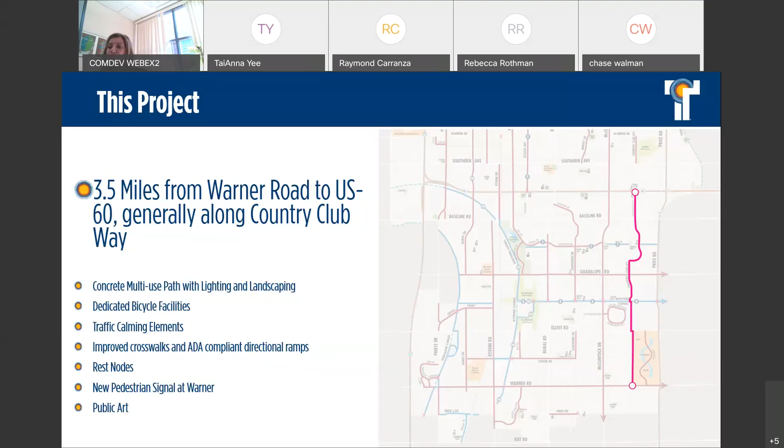So this project includes a 1-mile stretch of off-street facilities, and that will be the concrete multi-use path and equestrian trail on the west side of ASU Research Park from Warner Road to Elliot. And then north of Elliot, those are where we're going to see the on-street improvements. So that'll be the dedicated bike facilities, such as bike lanes, sharrows, or cycle tracks.

In addition to that, we'll be introducing traffic calming elements, improving ADA accessibility in the directional ramps at our crosswalks and our intersections. We'll be providing rest nodes with this project, a new pedestrian signal at Warner Road, as well as the integration of public art.

And that public art process is ongoing currently. There's a citizen selection committee that reviewed artist submissions, and it's now narrowed down to 3 artist finalists. So our goal with that was to get a public artist involved early on in this project so that they would be able to integrate a public art piece within the construction of this project. So that citizen selection, artist selection panel will make their selection shortly, and then that artist will hop on board to our project design team and begin to integrate their art within this project.

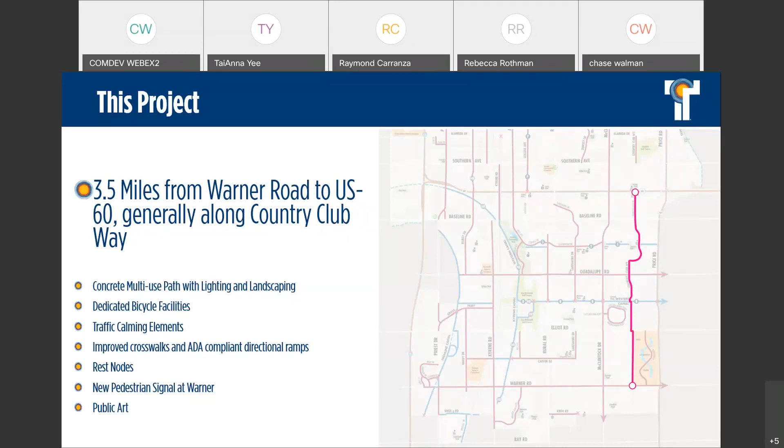So a little bit more project history. The project was first identified in Tempe's Transportation Master Plan in 2015. In 2016, we brought this project as well as other candidate projects to our Transportation Commission to see what they would recommend for us to move forward to compete for grant funding. And in 2016, they recommended this project move forward to compete within the region for additional grant funding.

And we secured an $82,000 grant, which developed our preliminary designs for the project and allowed us to do our first round of public meetings on some conceptual designs and the alignment of the project. And then ultimately, it allowed us to understand the project costs so that we could begin to program the project in the city's capital improvement budget, as well as to seek additional federal grant funding for construction.

So we completed that design, and in 2018, we understood the costs and pursued a federal grant, which we were awarded just over $2.6 million for the construction of this project. And that was for this project from the US 60 to Warner Road.

We kicked off the final design in 2019, and we were about to go out to the public when the COVID pandemic hit, and we were delayed slightly due to not being able to hold those public meetings. We were finally able to have this virtual platform so that we could start soliciting feedback and move this final design forward. So we held our first round of public meetings in October this past year, and this is our second round of public meetings.

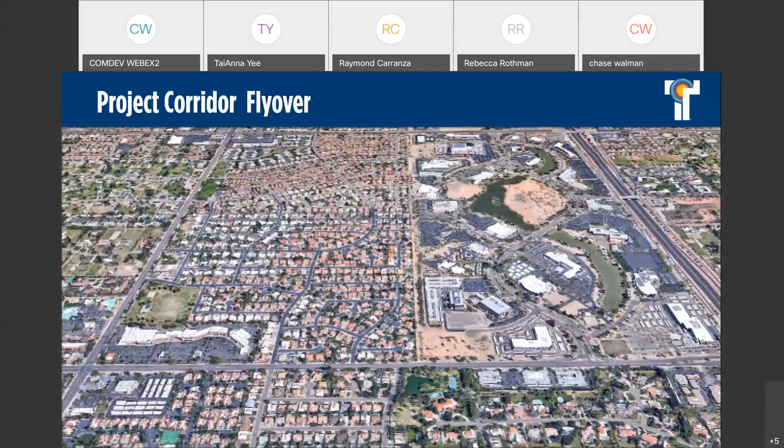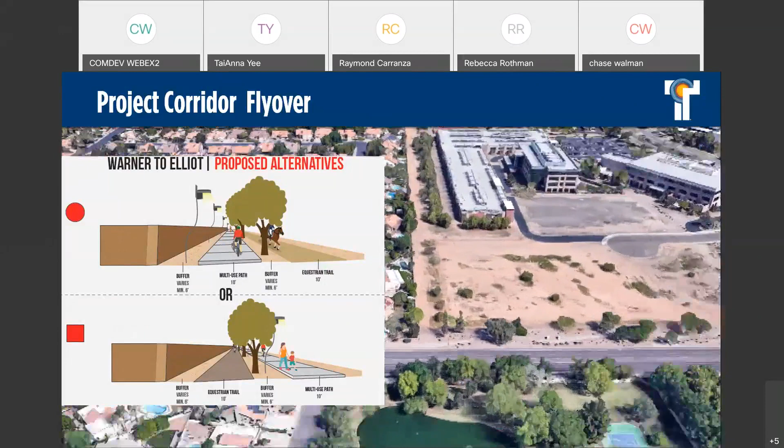This first section was the multi-use path and equestrian trail section. We proposed two alternatives for this section: either a multi-use path on the west side of the easement and the equestrian trail on the east side, or the flip of that, with the multi-use path on the east side of the easement, buffered by the equestrian trail and some landscaping.

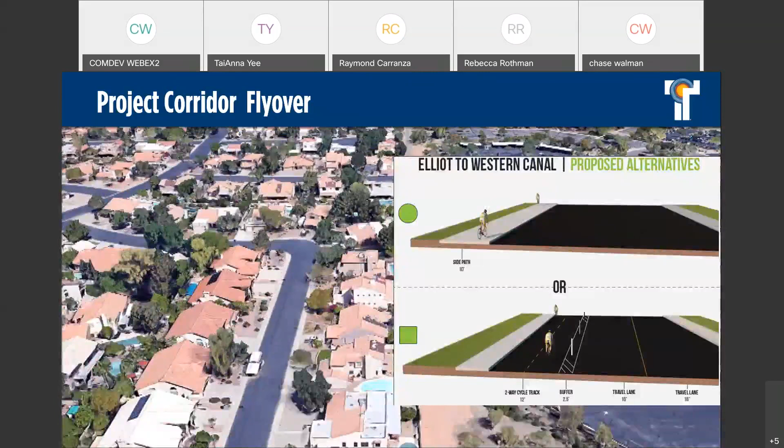Ultimately, the residents selected to have the multi-use path on the east side of the easement, that alternative. The residents in the area directly adjacent cited that it would have more of a buffer space between the path users and those private property walls.

The video's currently moving north. This is one of the neighborhood entrances to the ASU Research Park section of the project. And now we're approaching Elliot Road. It looks like we're having some difficulty here syncing the alternatives, so I apologize for that.

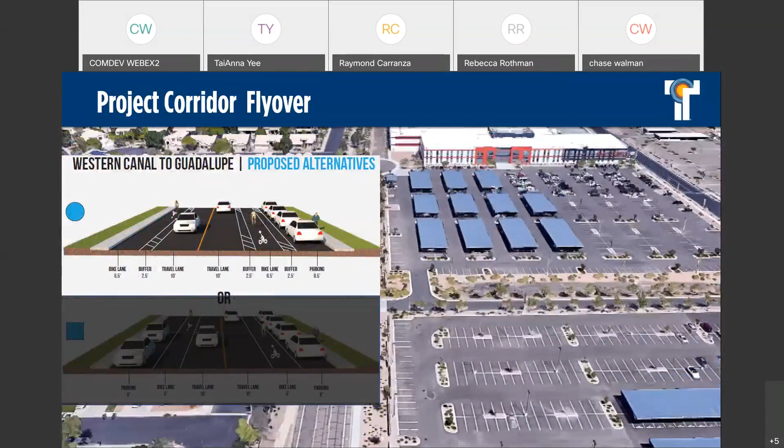This is the Shutterfly Way section, where we proposed either a two-way cycle track on the west side of the street or a side path, which would be off-street. Ultimately, the two-way cycle track was chosen for this section.

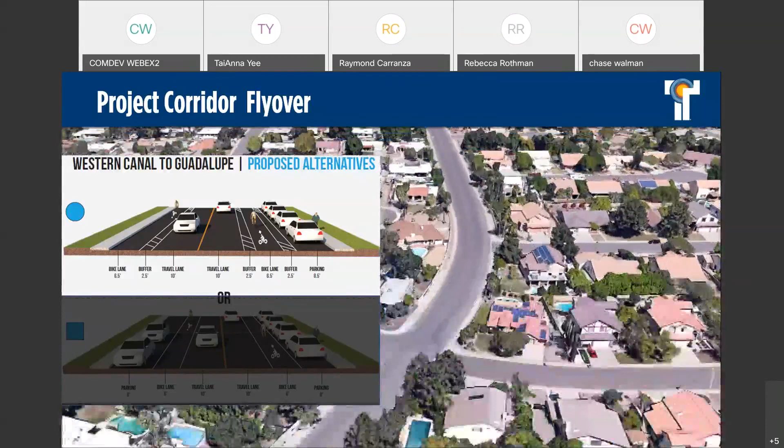The project's moving north, towards Western Canal and more of our neighborhood location. Here, we presented an alternative of either a buffered bike lane section through the removal of the west side parking of Country Club Way from Western Canal to Guadalupe, or standard bike lanes with parking on both sides of the street. Overwhelmingly, the feedback for this section was to pursue the buffered bike lane alternative, which would remove that west side parking and allow a buffer for the southbound and northbound lanes in between the travel lanes as well as the parking on the east side of the street.

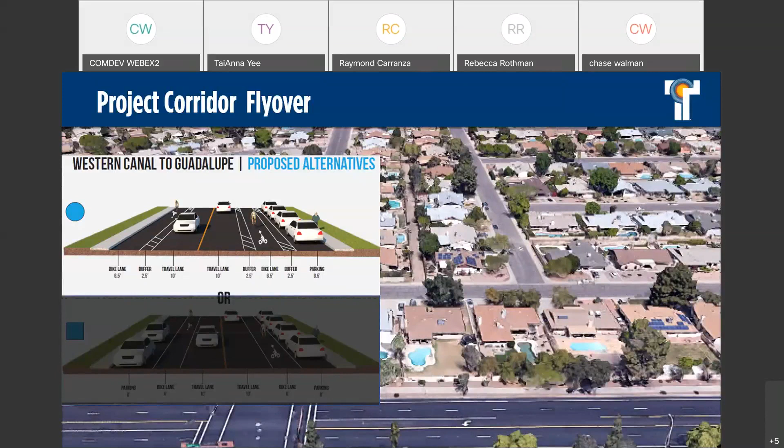So here we'll continue from Guadalupe Road, working our way north. This is where our available right-of-way gets a lot more constrained throughout this neighborhood in Optimist Park. So we presented two alternatives for this section: a bike lane with parking section from Guadalupe to Watson, or this shared lane alternative, which introduced a buffer in between the shared lane and the parking.

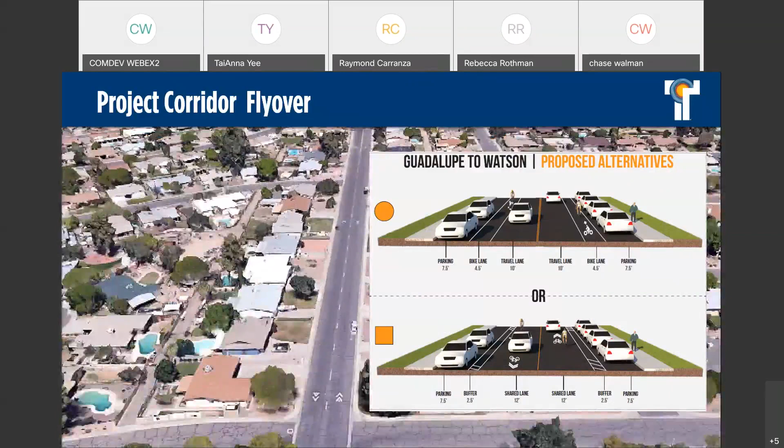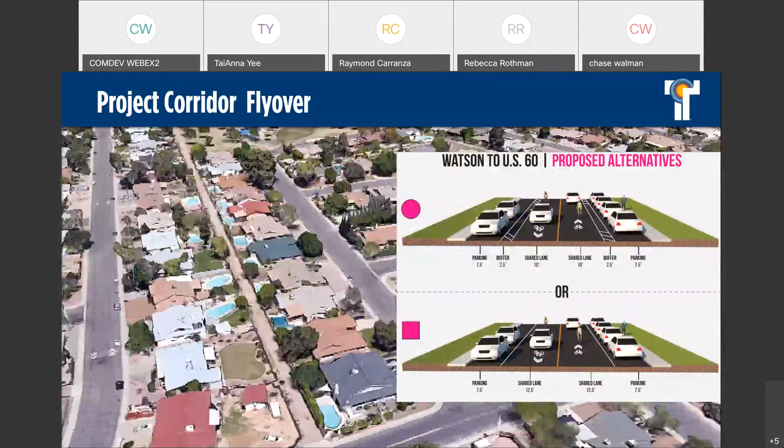This is an alternative that we're seeking additional feedback for as well. And finally, our tightest and most constrained corridor is this Watson to US 60 section. Here we are presenting two alternatives: either a wider shared lane alternative with parking adjacent, or a more narrow shared lane alternative, which introduced a buffer in between both parking lanes. Ultimately, the shared lane with the buffer in between the parking was chosen for this corridor.

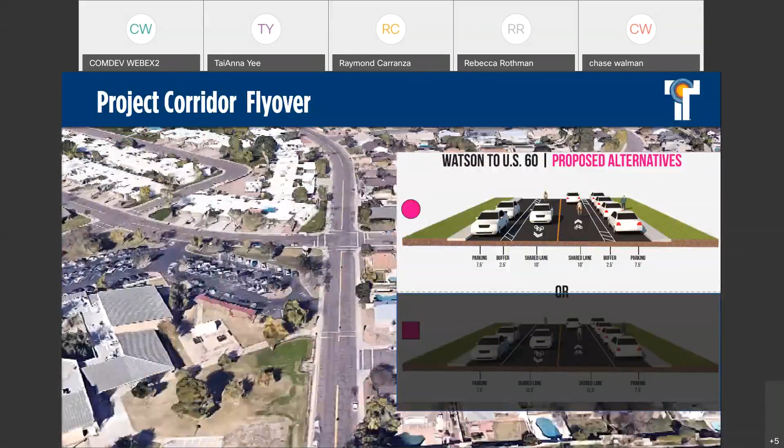We're working our way north still towards Baseline. We just passed Fuller Elementary and the Optimist Park and El Paso Path project. This is the same width that we experienced all the way to the US 60. So this alternative will continue past Baseline Road here and towards the US 60 pedestrian bridge.

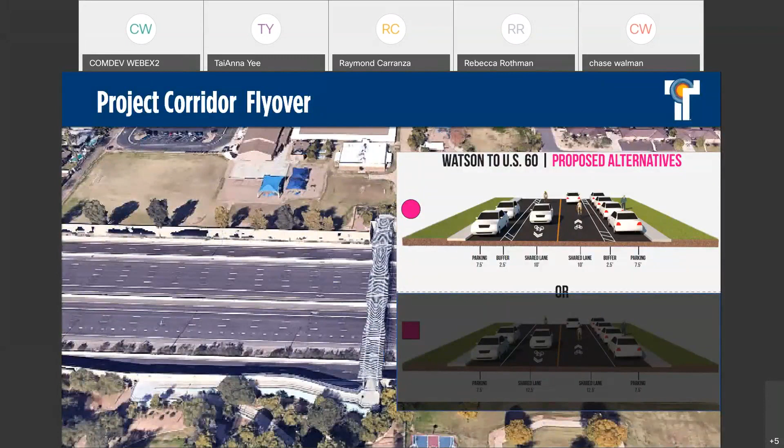Beyond the alternatives that we moved forward through the last round of designs, we also picked out some common threads from the written responses. One of these common themes was the introduction of a pedestrian signal at Warner Road.

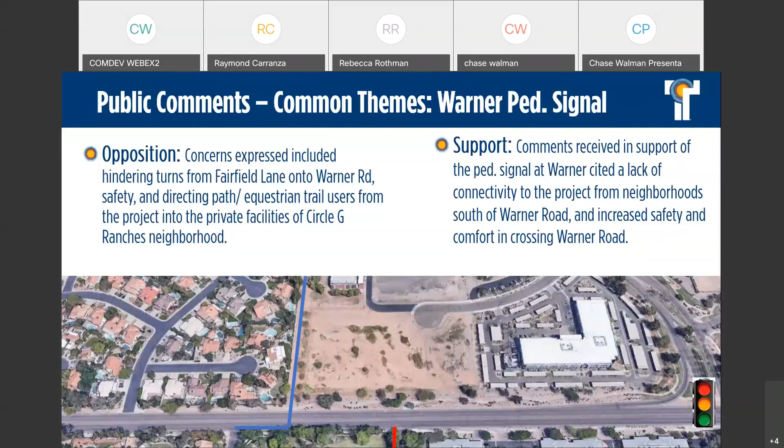Seeing these comments for the pedestrian signal, it was obvious that we needed to review more and better understand what the impacts would be by introducing this signal, having the traffic engineering team—not only from HDR but also the city and our city traffic engineer—understand the impacts, and go a little deeper into these concerns.

One of the things we did was collect more data, especially surrounding the concern about turning movements onto Warner Road. We wanted to confirm that our original data collection from the beginning of the project still reflected existing conditions today, assuming we're observing about a 30% reduction in travel counts for this section of South Tempe.

We went out in the AM and PM peak hours on 4 days, and these numbers represent the turning movement counts observed during those peak hours. That ranged from 17 to 28 per hour, the lowest being the left turn off of Fairfield onto Warner Road going westbound, and some of the highest being eastbound Warner Road traffic turning right onto Fairfield Lane. This was data we wanted to confirm when we went back and studied the impacts of this pedestrian signal with the traffic engineering team.

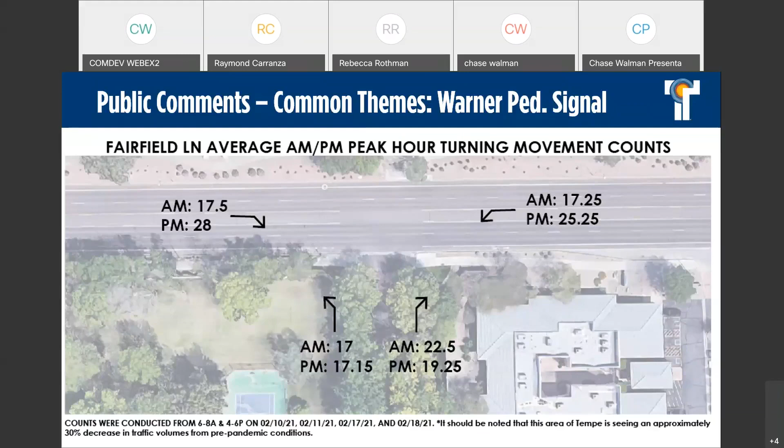This is an image of the proposed alignment of the pedestrian signal and some of the additional traffic engineering review for specific concerns. The first was the turning movement from Fairfield and the concern it would be hindered by this pedestrian signal. Through the traffic engineering review, it was determined the turning movements from Fairfield would actually benefit from this signal, because larger gaps would be created to help the turning movement onto Warner. This pedestrian signal is only activated when a pedestrian is there to actuate it by pressing the button; otherwise the signal is not stopping traffic.

Once activated, it will stop traffic both eastbound and westbound to allow bicyclists and pedestrians to cross Warner Road north and south, and this phase would be about 30 seconds. With that signal turned on, it creates a larger gap because eastbound traffic would be stopped before the signal, allowing a larger gap here at Fairfield Lane.

In addition, the traffic engineering review determined there would be a safety benefit also created by that larger gap—providing not only a dedicated phase for pedestrians and bicyclists to cross Warner Road without vehicular traffic, but also removing a potential conflict point of eastbound traffic interacting with those trying to make turning movements off of Fairfield Lane.

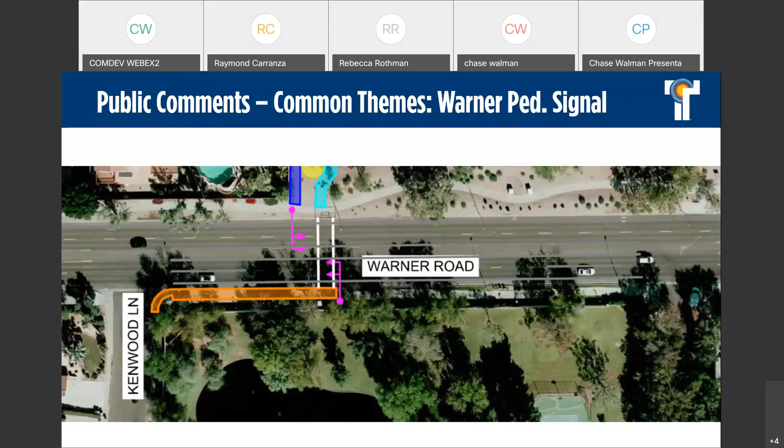Some other common themes we observed through the written comments were concern for removal of mature trees within the ASU Research Park section. These were the established trees on the east end, primarily of this 40-foot easement that we'll be utilizing with this project. So with that, we went back and...

conducted a tree inventory to understand the tree health out there, the estimate of their caliper size, the type of trees they were, and ultimately determined their location and its relation to the proposed improvements of this path project. We highlighted these in red icons, and all these materials are also available online, so you could zoom in specifically and see which trees would be impacted through this project, indicated by those red symbols. The green symbols are the proposed new trees for the project.

With this tree inventory, we understood it would cause the removal or relocation of 36 existing trees in conflict with this project. But with that, we will also be specifying 158 new trees along this section between Elliot and Warner Road.

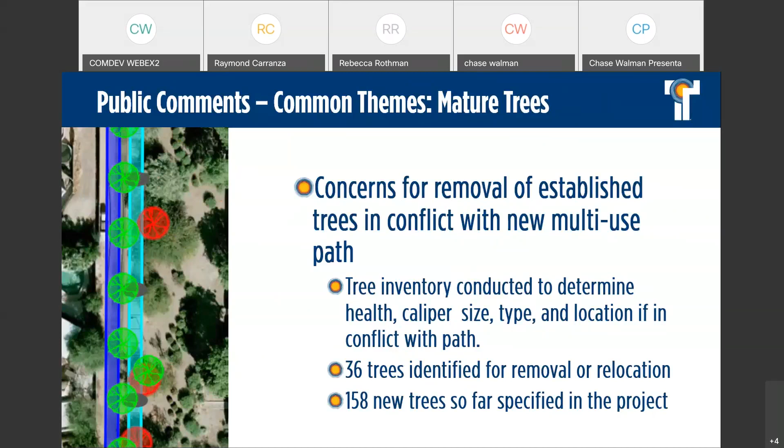And finally, there was a common theme regarding the rest node locations, specifically the type of seating we were proposing at the rest nodes, as well as a concern for lighting within the rest nodes.

Ray will get into how we responded to some of those comments, introducing more lighting. But most importantly, after talking to some of the property owners directly adjacent to these proposed rest node locations, we adjusted the locations of these rest nodes so that they were no longer adjacent to any private property wall.

This is a zoomed-in example of one of the proposed locations, just south of Elliot Road, which has this buffer space in between the wall. This wall to the left is actually an alley wall, and past that alley is where the private property walls are. So with that, we adjusted the location so that no rest node was directly adjacent to any private property wall with the project.

And then we improved the lighting as well as adjusted the seating so that it was more individualized style seating instead of a longer seat wall.

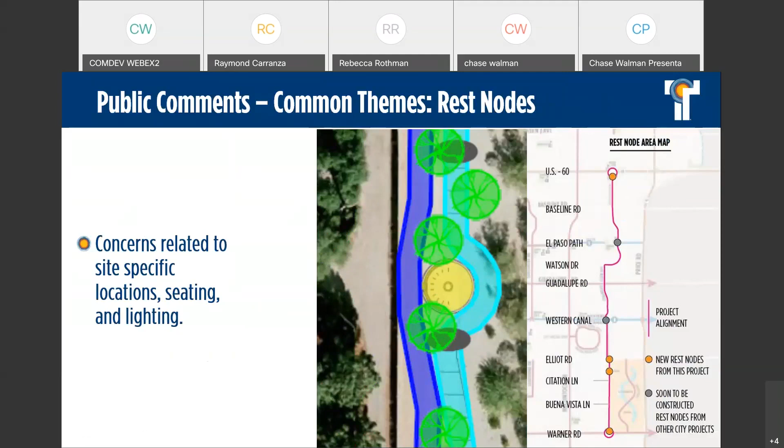So in that previous feedback, to summarize, we asked the public for their feedback on these alternatives, and we're left with these alternatives moving forward in this 30% level design. The Watson to US 60 section was the shared lane with a buffer in between the parking and that shared lane. For the Guadalupe to Watson Drive section, we'll be seeking additional feedback on two alternatives still - a standard bike lane with parking, or a shared lane with a buffer in between the parking.

The Western Canal to Guadalupe section's preferred alternative was buffered bike lanes with the removal of the west side parking along Country Club Way, maintaining the east side parking. The Elliot Road to Western Canal section's preferred alternative in the last feedback was the cycle track, but after reviewing with the traffic engineering team, we also introduced an additional alternative we'd like feedback on - a buffered bike lane alternative.

And finally, for the Warner Road to Elliot Road section, the preferred alternative moving forward was having the equestrian path on the west side of the easement and the concrete multi-use path on the east side of the easement along ASU Research Park.

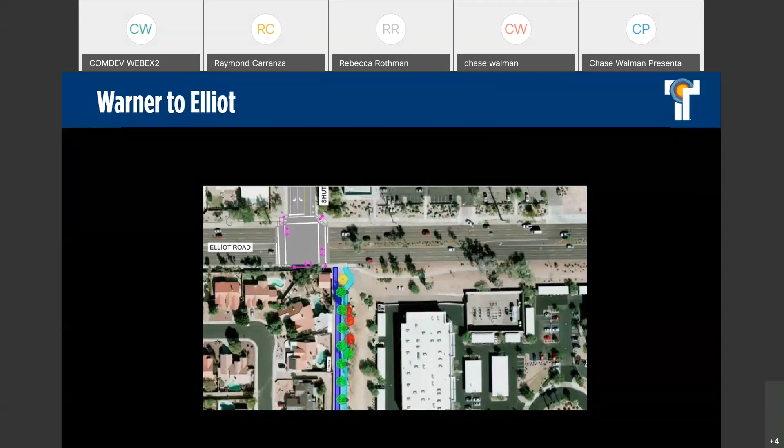Next slide, please. So here's the Elliot to Western Canal segment. As Chase mentioned, we are looking at two different striping options. First, we'll look at the one on the left side - the buffered bike lane alternative, showing bike lanes on both sides with one lane of traffic. Existing conditions in this area, there's currently no parking allowed, so in both these options we're maintaining that and not allowing parking.

Let's go ahead and start the video. So here's that first alternative where we're looking at the buffered bike lane in both directions. There's a 40-foot wide roadway existing today, and as we approach north on Shutterfly Way, it ends at a cul-de-sac. We're planning to reconstruct the sidewalk just on the north side of that cul-de-sac to promote north-south movement of bicyclists.

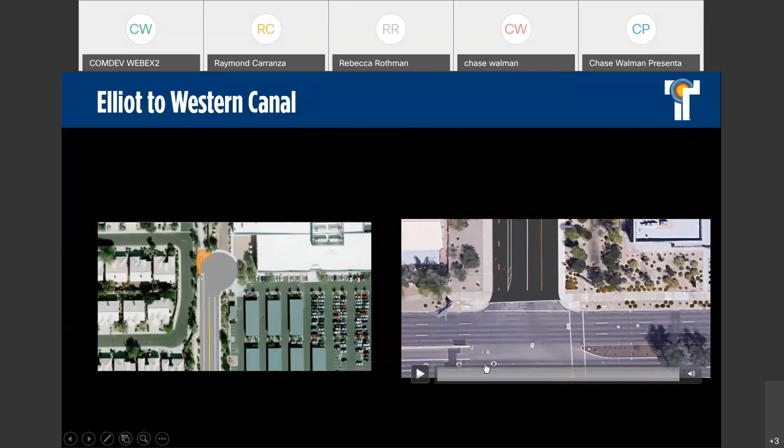So here we are. This is the Elliot to Western Canal segment. From the cul-de-sac to Western Canal, there's an existing 12-foot multi-use path that will remain. The scope of this project is not planning to make any modifications to that.

As we head north to Western Canal, there's some planned improvements being done on a separate project that's going to improve the Western Canal path in this area, introducing another shade node, sidewalk improvements, ramp improvements, and some landscaping and grading. We're not making any modifications to that portion, and our improvements pick up just north of Diamond Drive. So let's roll the video, please.

Between Western Canal and Guadalupe, just based on public feedback, this is the alternative that we're going with. We have the buffered bike lane on the west side, and on the east side, we have the buffered bike lane with one lane of parking. Along this segment, there's privacy walls on both sides and no existing driveways that connect to Country Club Way.

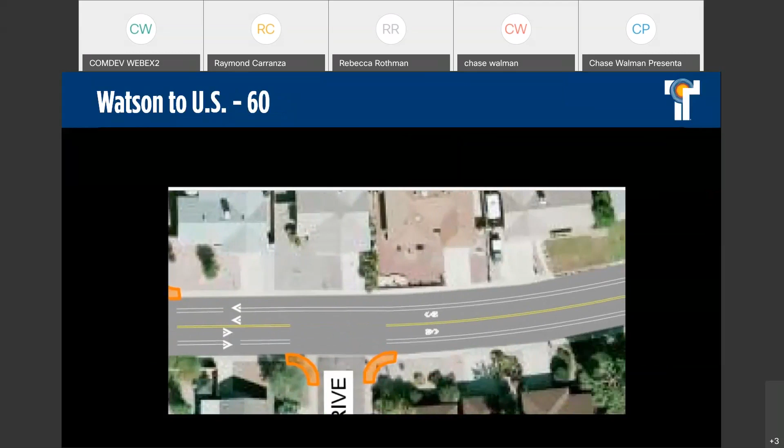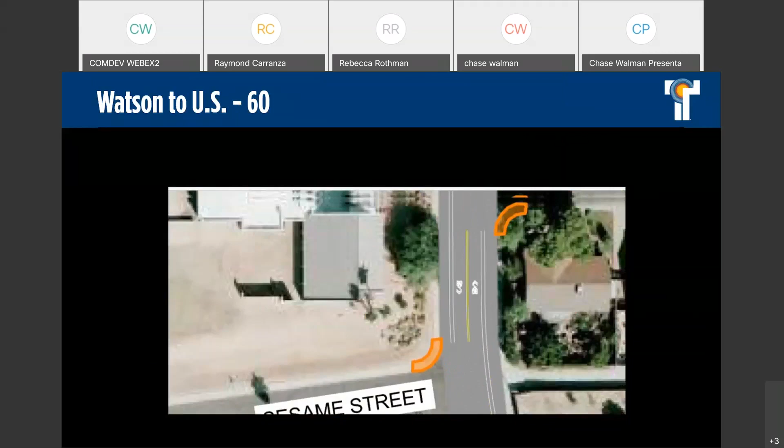What we're moving forward with here, with public input from the previous public meeting, is going with shared lanes, buffered, with parking on both sides. Along this segment, there's on-street parking that's currently allowed today, so that will remain, and there's existing private driveways that connect to this roadway.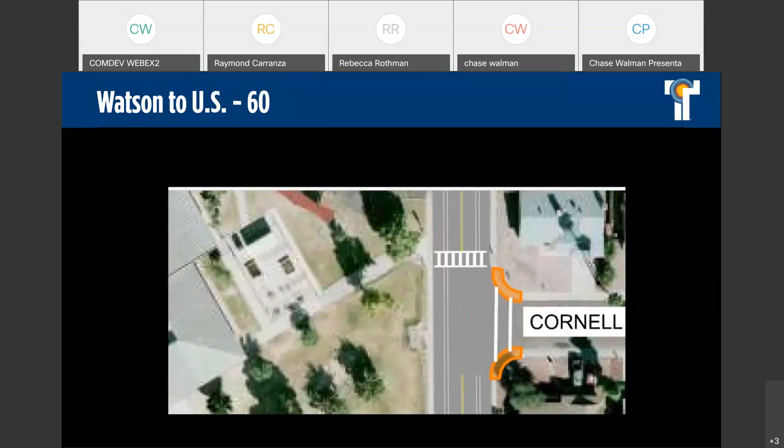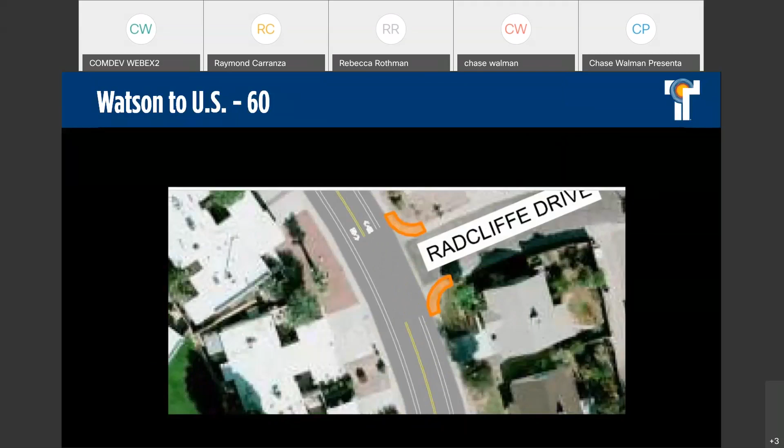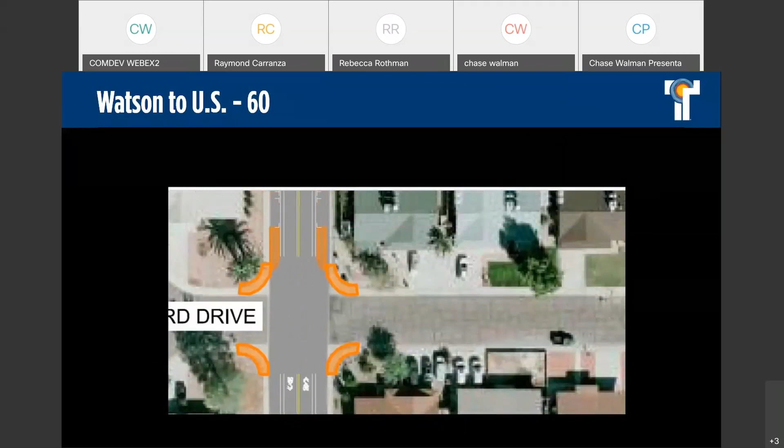As we approach Baseline Road, we have the south leg and the north leg where we've introduced some traffic calming measures. South of the south leg of Baseline, we'll have curb extensions, which you can see here, and north of Baseline Road, we'll have a raised median.

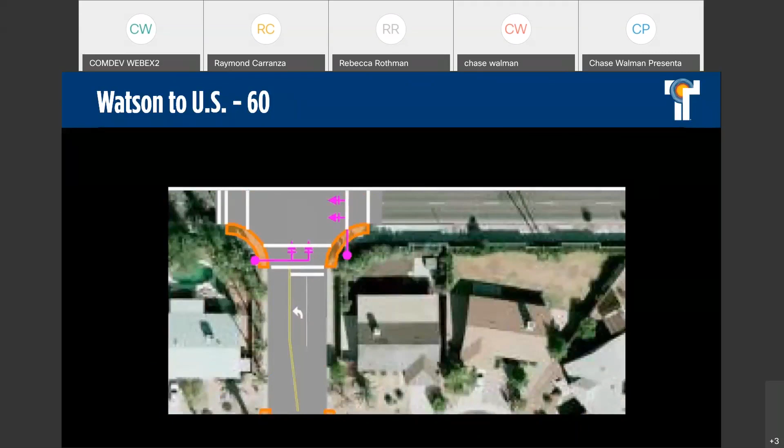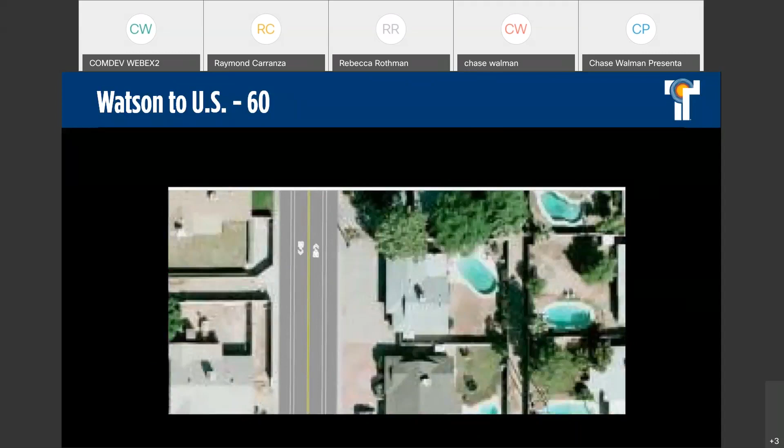At Baseline Road, and also at Guadalupe Road, we are proposing some new reconstructed traffic signals that conform to current standards, looking at the pedestrian push buttons to be compliant, and replacing the single ramps with directional ramps. So that's going to happen. Those intersection improvements will happen at Baseline and also at Guadalupe.

And here we just passed Carson Drive and Cole Park, where we're introducing our fourth shade node structure. And then here we are at the end of the north termini at the US 60 pedestrian bridge.

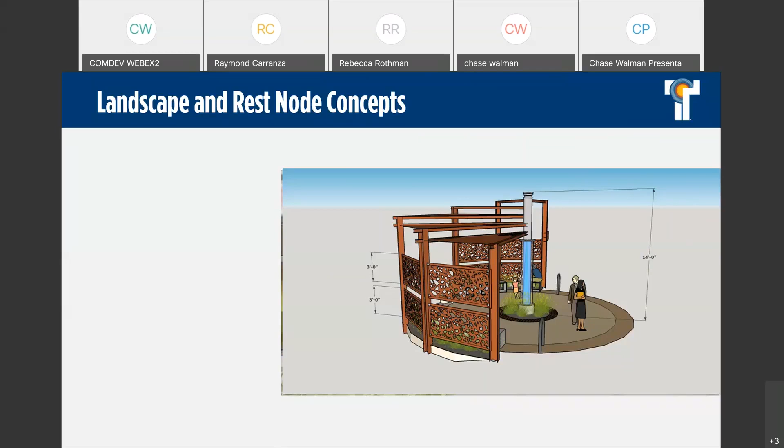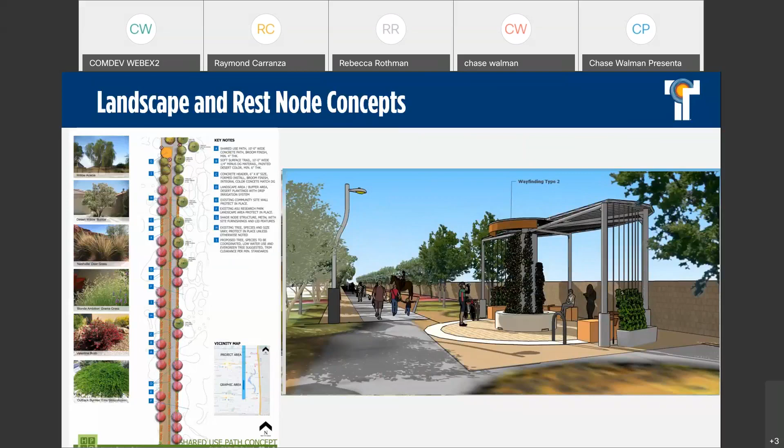Some of the amenities that we're looking at include seating. You can't see it here, but I think we have another picture that shows a better view of the seating, which will be individualized. There's going to be landscaping around there, lighting with a lot of different lighting concepts, bike racks, drinking fountains, so a lot of different amenities.

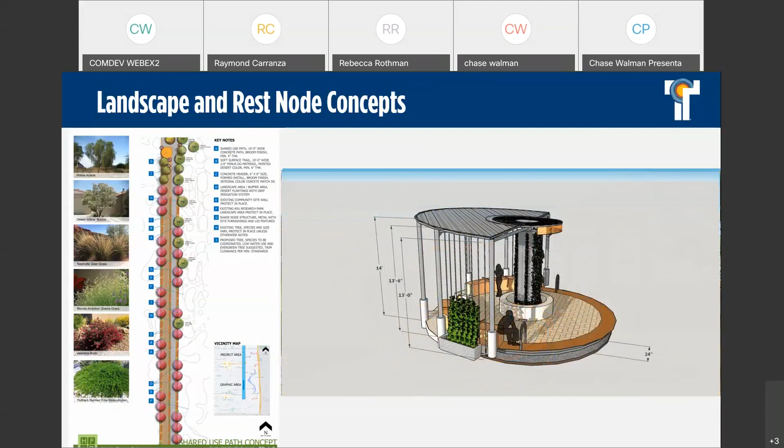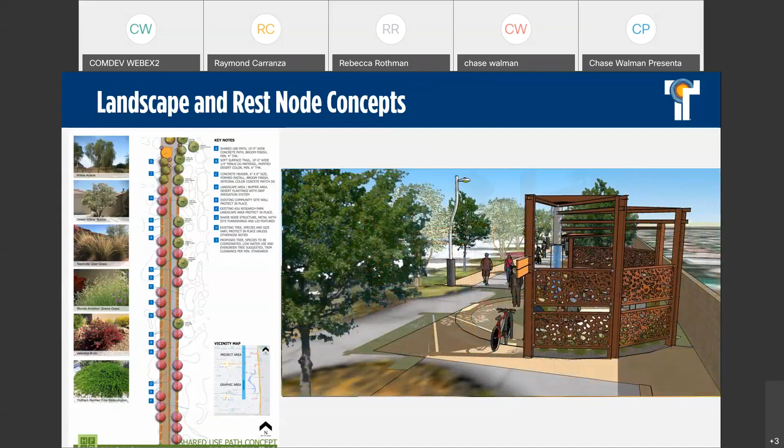As far as landscaping, what we showed in that video was more of a concept, but this is like a 300-foot segment between Warner and Elliot that gives you more detail of what the landscape design will look like. We're looking at trees along both sides of the corridor, along that 40-foot public utility easement. The trees will be a low water use variety, native to the area, and we're planning to put as many trees as possible within that segment to provide shade and give a more aesthetic feel as you go through.

And here's a good picture of the individual seating. So Chase mentioned some of the feedback we got was that they wanted to move away from bench seating to more individualized seating. So this gives you a good picture of what we're looking at for that individualized seating under the shade node structure.

I'd add too that we're looking for feedback here on some of the amenities we're providing. What's shown isn't really an A or B option — we're looking for feedback about the vertical panels versus the water harvesting or low impact development, plants in the middle, and the lighting. These are just concepts shown, and the design may change depending on the public art integration into the project. So don't look too closely at the colors being proposed, but more at the structure and amenities. We're really looking for feedback about other amenities we could add, or what's liked or disliked about what's being proposed.

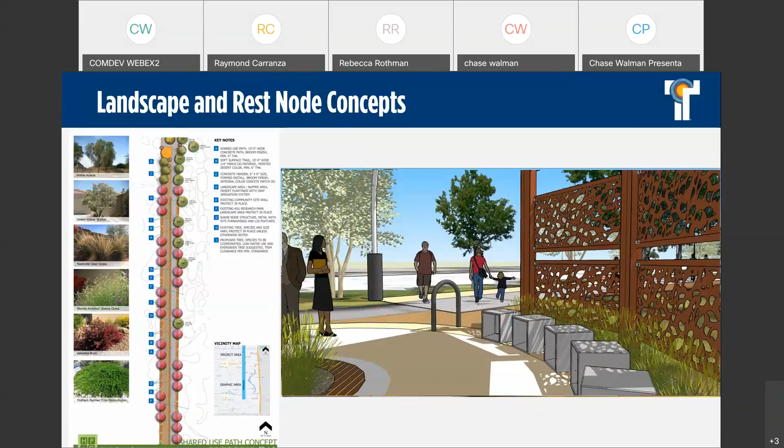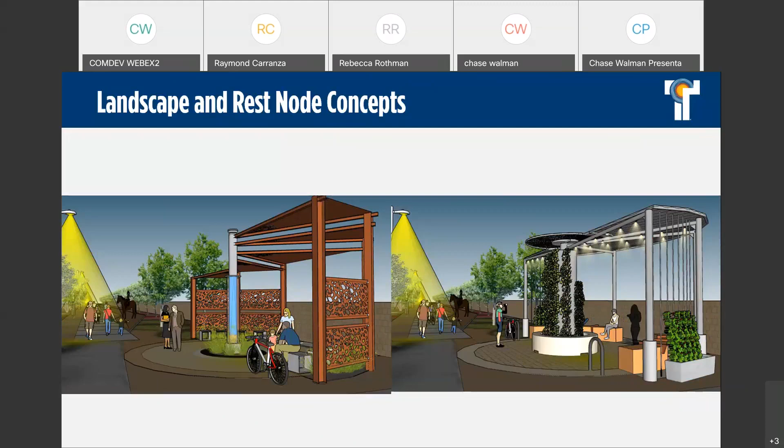And with that, I'll toss it over to you, Chase.

Thank you, Ray. Now I'll quickly go over our next steps. At our first round of public meetings we collected feedback, as well as through a few city commissions, including the Transportation Commission and Sustainability Commission. This is our second round of public meetings — we held one on Saturday as well, and the public comment period for this round ends March 7th. We'll take all that feedback from the commissions, internal city review across departments, and public feedback from this round, and reiterate the design to develop the 60% level design. From there we anticipate finishing the final plans, specs, and estimates late this year, and hope to advertise the project and begin construction in early 2022.

So again, that survey is available at www.tempe.gov/forum. I know the videos were a little laggy so it may be difficult to view some of the alternatives, but all these public materials, including materials from the first round of public meetings, are available at the project website, tempe.gov/countryclubwaypath. That way you'll be able to zoom in closer to all the materials we presented today. On the bottom right is my contact information — if you have additional questions beyond the Q&A we're about to have, feel free to reach out. I wanted to thank you again for participating and giving your feedback during your lunch hour today. And with that, I'll hand it off to Laura.

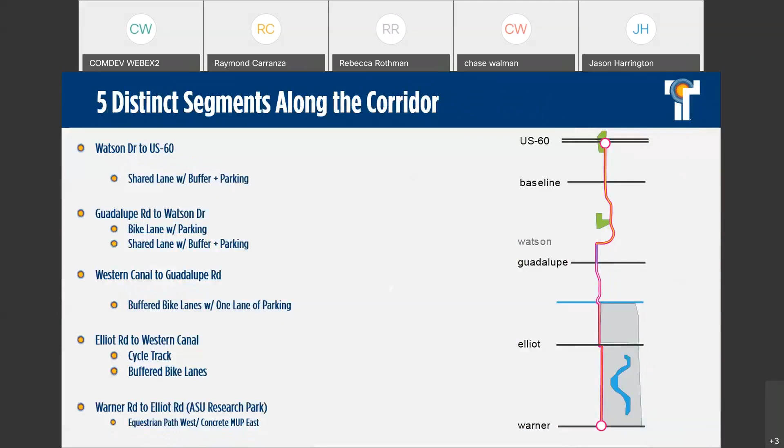Ray, do you want to talk about the Elliot improvements? Yeah, if I'm understanding the question right, if we go with the cycle track option there will be a designated striping lane. So imagine extending that cycle track alignment further south, there'll be a sidewalk ramp in line with that cycle track, providing the connection point between the cycle track and the south curb of Elliot. Correct, yeah.

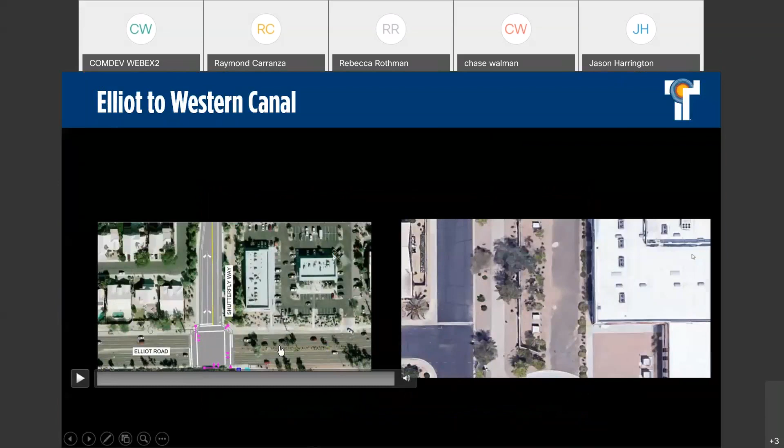Thanks, Ray. Okay, another one from Joy: will shade be provided at or near the traffic signals for those waiting for the green phase?

Sorry, I went a little too aggressive here on the PowerPoint progression. We'll look as far as available right-of-way. Unfortunately, there's a lot of those street entrance areas where we don't have a lot of available right-of-way to fit in additional trees, but we'll look for every opportunity, especially around those signals, if there's enough space to add additional landscaping. Unfortunately, a lot of those areas are constrained with available right-of-way.

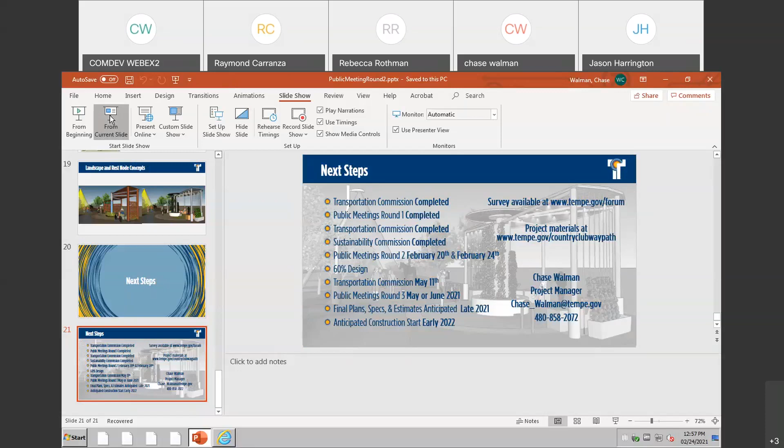And we have another one. What is the ongoing maintenance plan? The maintenance plan is programmed through the city's pathway capital maintenance budget through the CIP process. So before we pursue these projects and budget into the CIP, we have a cost for what we experience with this path maintenance, to allocate in the budget and in the CIP for continued maintenance of these projects. So this is already programmed in the city's pathway capital maintenance fund through the CIP.

Thank you on that one. Another one from Ann, this is regarding amenities. This is something you'd want to put in the survey response, but she says, can we get dog poop bag dispensers along the route? Yeah, that's something we haven't received feedback on yet, so we'll definitely explore including that into this project as well.

Okay. For some reason it's not wanting to scroll up. I feel like I have a few older questions that maybe have not. Here we go.